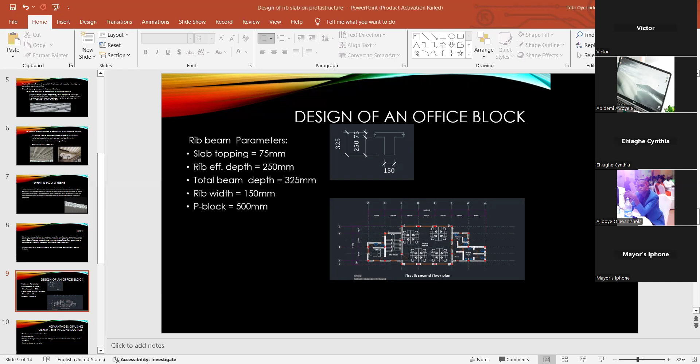There's a background noise coming from someone. Somebody should mute their microphone on the other end, so it will not disturb your lectures. Yes, I'm here. Yes, I can hear you. Can anybody hear me? Yes, I can hear you.

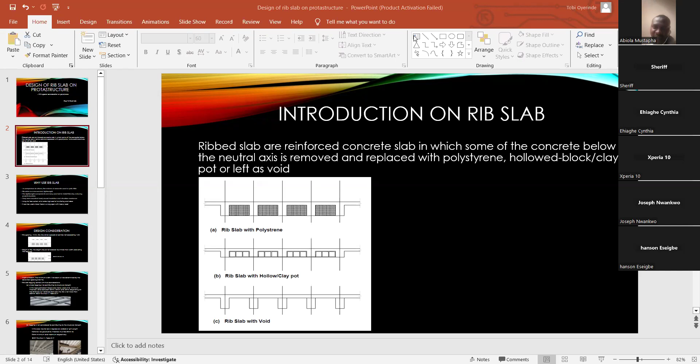So, like I said, I'm trying to introduce everyone to the rib slab. The rib slab is a type of reinforced concrete slab in which some of the concrete below the neutral axis is removed and replaced with either polystyrene, hollow clay pots, or left as void. As you can see in the example, we have a rib slab that is replaced with polystyrene, or the neutral axis is replaced by hollow clay pot, or it can even be left as void.

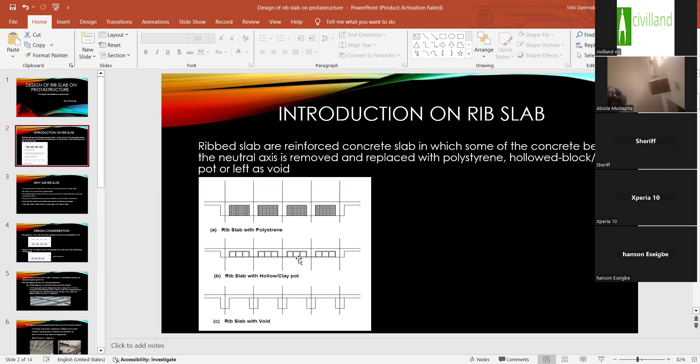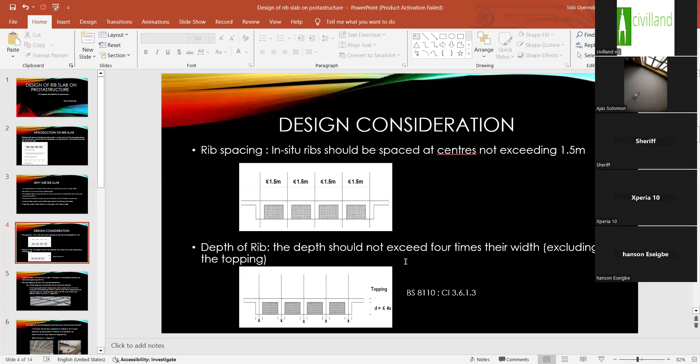So in the design of rib slab, there are some considerations we need to adhere to. One consideration is the spacing of the ribs, which should not be more than 1.5. Another thing is the depth of the rib. The depth of the rib should not exceed 4 times the width, excluding the topping. For example, if we have a rib of 100 mm, the depth should not exceed 400. The minimum width of the rib can be determined by the cover, bar spacing and fire.

The other consideration is if the topping is not contributing to the structural strength. In this type of rib slab, you can leave the spacing as void, or you can use polystyrene. So those are the considerations before you design a rib slab.

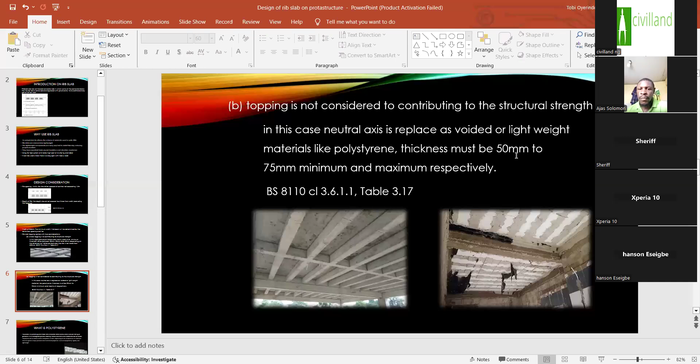In one of my recent projects, when I posted some of these pictures, a lot of people asked, engineer, what is polystyrene? Polystyrene is a synthetic polymer made from the monomer styrene. So polystyrene is actually a petrochemical product. In our local language, we call it fuke fuke. I don't know if people understand. Fuke is what we call these things.

When we were very small, we used to play with it. If you put it inside petrol, for example, you can see the instant reaction. That tells you that polystyrene is a petrochemical product. Polystyrene can be hard, solid plastic, or foam, depending on the temperature the manufacturer decides to use.

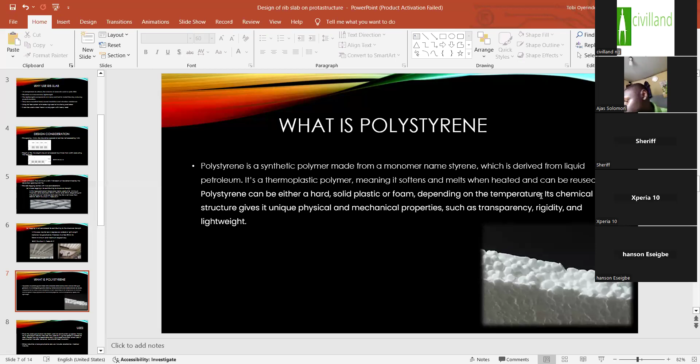So one of the uses of polystyrene for construction purposes stems from its lightweight nature. Polystyrene is very light, so that's why we sometimes recommend it for some of our clients. Maybe they want to do a high-rise building and maybe the soil on that land is very poor. So most times we recommend or we design a rib slab with polystyrene so that it can reduce the overall weight of the building going down to the foundation.

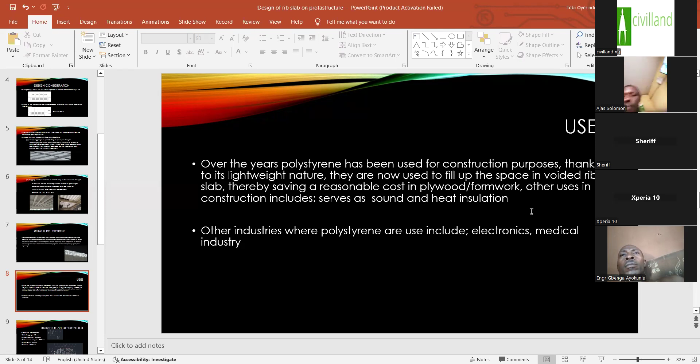So other uses of polystyrene include electronic and medical industries. So now we dive into the design proper. And before we go into the design proper, there are some parameters we use during our modeling. So I'm going to use a topping of 75 mm.

Remember that one of the considerations is that if you are using polystyrene, that is, if the slab is not contributing to the structural strength, the topping should be less; it should be between 50 mm and 75 mm. So you can see that the topping is very small, unlike our usual solid slab where we can go as high as 120, 150 for our solid slab.

So the effective depth I'm going to use is 250 mm. Then total depth is 325 mm. The rib width is 150 mm. And the spacing, this P block means the spacing of the ribs. That's actually the size of our polystyrene. So the polystyrene standard size from the manufacturer is actually 3 meters by 3 meters by 600.

But we cut it into sizes as designed. So in this case, our polystyrene size is going to be 250 by 500 mm. So we'll see more of this during the modeling in Protastructure. So I will stop this one now. Then I will open the modeling so we can all see how it's done.

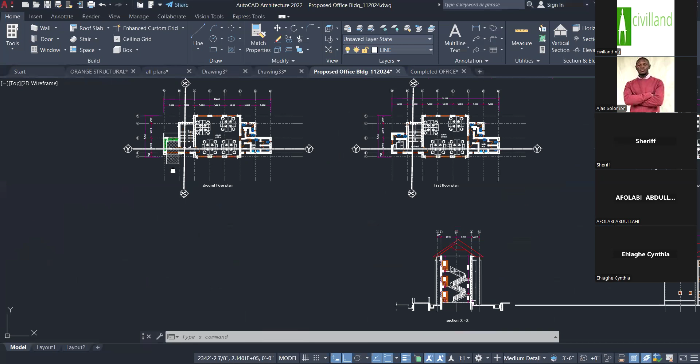So this is actually Protastructure software for people that don't know, one of the engineering software that we use in design. So here I want to design an office block. Okay, let me show you the AutoCAD drawing. So this is the plan that we want to design. It's an office block of 9 meters by almost 8.5 meters.

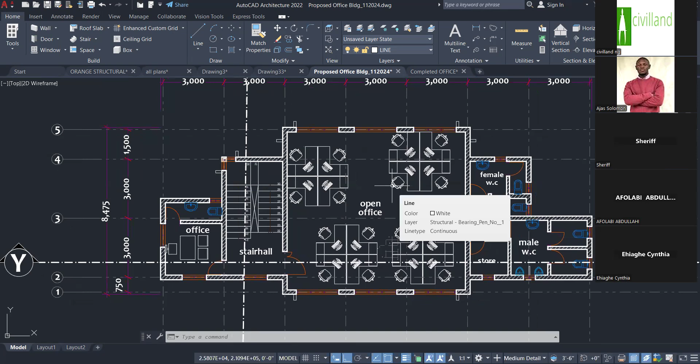So I'm particular about this open space. That's one of the advantages of using a rib slab. It can go as far as a 9 meter by 9 meter spacing. When we have a length and breadth of 9 meters by 9 meters, in this kind of case, a solid slab cannot work, but a rib slab will work conveniently. And the floors are the same thing. You have the ground floor and first floor plan. So now we go back to our design software.

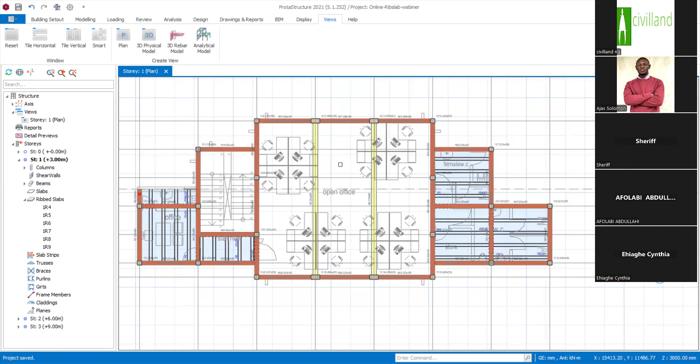Yeah. So because this span is large, I have to divide it into three and put a beam. So this panel is now divided into three panels, so that it can be convenient for the rib slab. So now remember the parameters that we have in my PDF. So I'll use the same parameters for this rib slab.

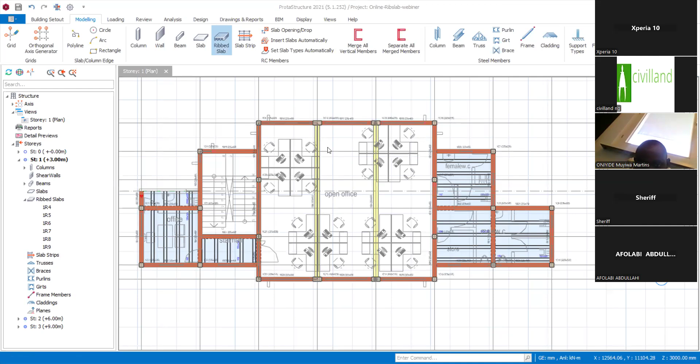Our width is 150. Then our height of the beam is 325 mm. The topping of the slab is 75 mm, while the base block is 500 mm. So we now insert this into our model. So I've inserted the rib slab into our model.

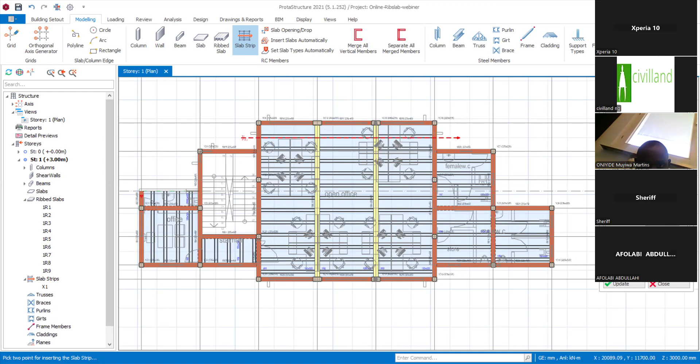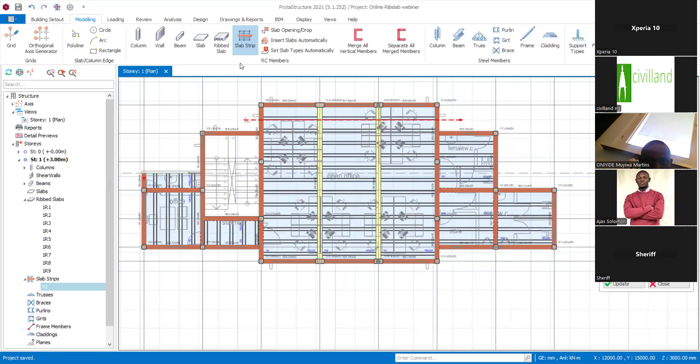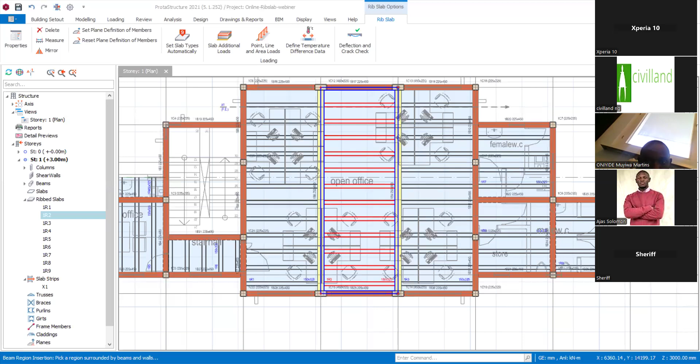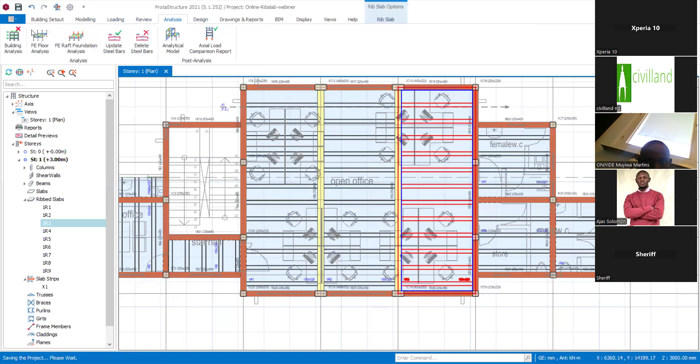So the next thing is to check our analysis. Let me see, putting the axial load here. So I just want to quickly run this analysis.

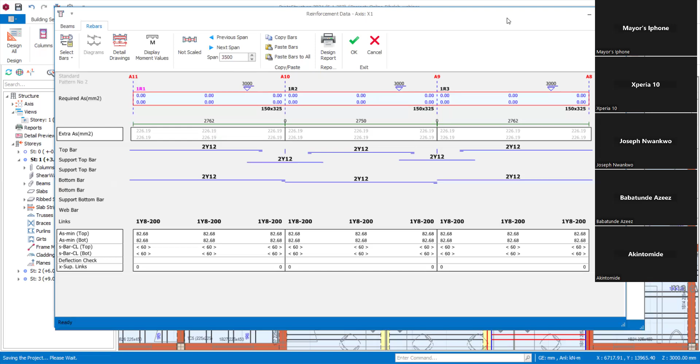So the design for this rib slab is completed already. One of the advantages of using this rib slab is that for the top slab of the rib slab, you don't even need too much reinforcement. Maybe nominal bars like wire mesh or 10 mm can be used. If you look at this beam now, they are just Y12 reinforcements, which shows that it's very economical using rib slab for our buildings.

But before we design for that, as a structural engineer, we have to work on the drawing, because it's not just that we say, okay, I've seen engineers using rib slab, so rib slab is the best. A structural engineer will actually decide the best way to design your rib slab. So for this modeling now, the modeling is done,

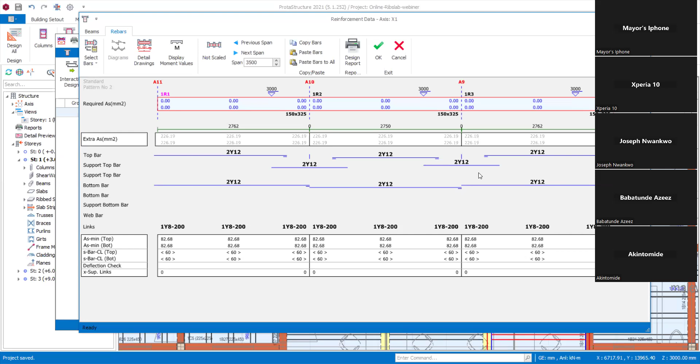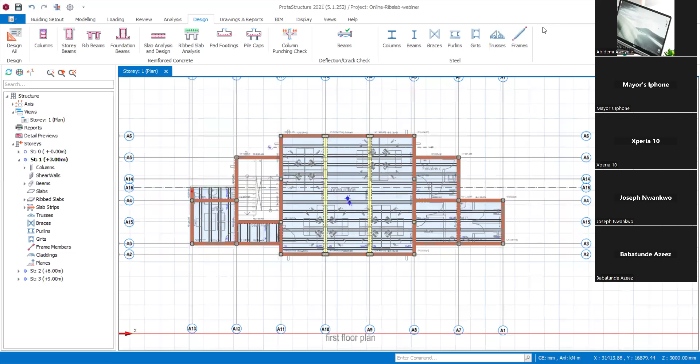and we can see that the reinforcement is okay. We have Y12 for both the ribs. You see all this spacing here, the reinforcement inside our rib beams is Y12 all through, and it's very accurate and okay. So there's no cause for alarm once the design is done and completed. Because of time, I will now take you back to our template.

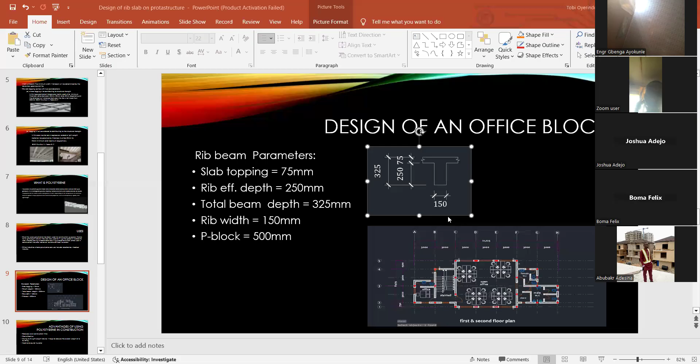Some of the advantages of using polystyrene are that it reduces the construction time and it's cost effective. You don't need too many beams; just the primary beams are very important. Unlike solid slab where we put beams everywhere, you don't need too many beams when you want to construct or design a rib slab. So it's very cost effective, because we are reducing a lot of material.

You are reducing formwork, you are reducing wood, you are reducing reinforcements, and since the volume of concrete is also reduced, you are also reducing the total cement, and the granite and sand will be reduced. So it's very cost effective. And owing to its lightweight nature, it helps to reduce the overall weight of the building. Like I said before,

if you have a very poor soil report, what we do is use polystyrene so that we can reduce the overall weight of the building. It's also good as a sound and heat insulator. People also use it for other things like interior designs now. You can use polystyrene for your parapet also; most people now cut it into the size of parapet needed. So I think that's all for now.

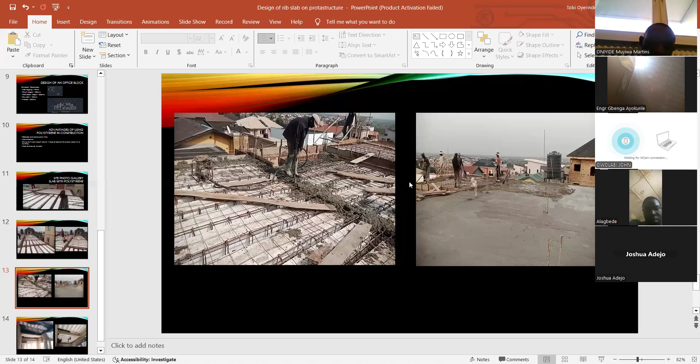Do we still have one or two questions? My question is, how safe is this in terms of fire resistance? That's one of the disadvantages of the rib slab. But in case of fire, only the polystyrene will be affected. The concrete will still be in shape. So even if the building is on fire, the building will not come down, unless there's a very enormous fire.

You can only have an issue with the polystyrene; the building will still stand. That doesn't mean the building will come down. The polystyrene is only taking space; it's not a structural member. So if I remove this polystyrene now, the building will still stay, just like what I showed you here.

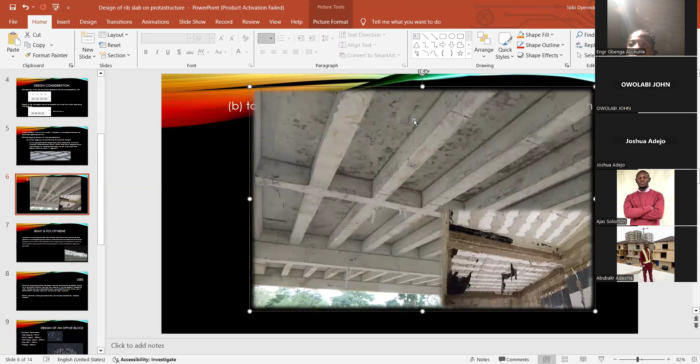You can see this is a voided rib slab. These are the spaces in between the ribs that the polystyrene is taking. So polystyrene is not a structural member, and there's not much effect on the building.

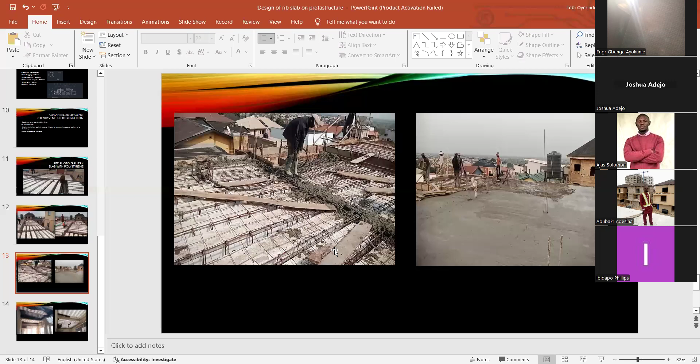Hello, good afternoon. Yeah, good afternoon, sir. Yeah, I'm sorry. Little did I know that the webinar would be today, and I joined not long ago. Unfortunately, I don't know if you have treated the aspect of the services. That I want to know. Number two, you've explained, I mean the little I could hear from what you're saying, about the rib slab.

How much time can the slab, the concrete element, I mean the structural element, withstand fire in case of any fire? How much time? Bearing in mind that the polystyrene you're talking about is inflammable. If it catches fire, it's going to help in the burning. It's going to help in combustion. So how much and how long can the slab and the beam withstand fire?

Two, have you treated services? No, we've not treated services, but I'll discuss it too. All right, so those are my questions. Okay, let me quickly answer that. So in the event of fire, somebody has also asked this, the polystyrene has a disadvantage. When it comes to fire, it can easily spread. So that is one of the disadvantages of polystyrene.

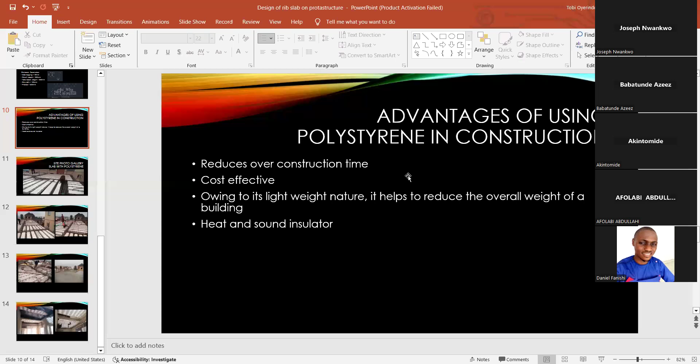So the building will not be affected. Let me not say it will not be affected; it will not have too much effect. Because once you have fire on the building, even concrete is weak; there are degrees of fire that concrete can attain. That's why we have reinforcement inside. So there is not much effect in the event of fire, because polystyrene is not a structural member. It's only filling up space.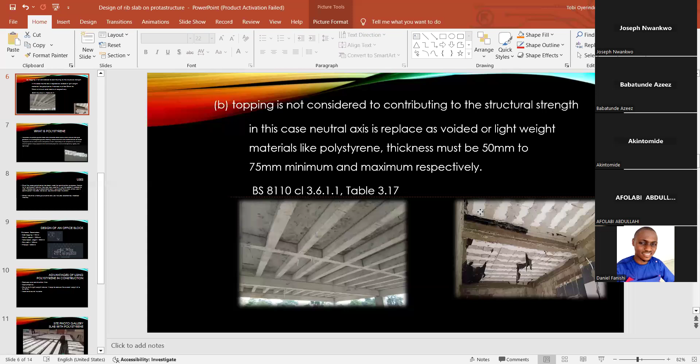Do you hear me, sir? Yes, I do. But personally, I would have preferred making the slab space hollow, removing the polystyrene. It will be better. Since it's not adding to the structural element, we can remove this polystyrene. I've used it before, way back. But what I'm actually particular about is the services aspect of it.

And the building is still standing, and that was about 15 years ago. It's an office space, 4 suspended floors plus a penthouse, and it's still standing as I speak to you. So it's a technology that is very good, the building weight is going to be very light, and all that you have just enumerated. But in the event of fire, will it not be better for us not to have those polystyrenes there? It will be better because it's going to help the concrete slab at the end of the day.

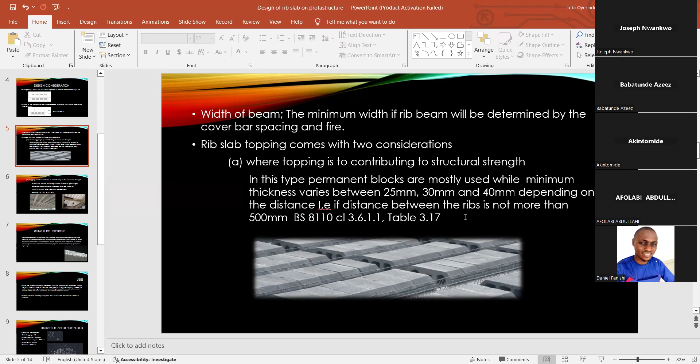So when are we going to talk about the services aspect? Yes, the services aspect is also achievable on site. If you look at these drawings, these pictures, the topping is 75 mm, and we have space in between the ribs. So in between those ribs, between the rib reinforcement and the polystyrene, you can actually pass your pipes. You get me? You understand? So you can actually pass your pipe in between the polystyrene

and the reinforcement. Another thing we also do is that under the polystyrene, we can just puncture and place what you want. You must have placed your pipes before you put even the polystyrene and the iron reinforcement. Some small services can be put in place. So once you are installing the polystyrene, you can just cut around it and put the polystyrene on top. So I've never had issues with services using polystyrene, because there are spaces where you can put them.

Why I'm saying that is I'm aware of some structural engineers that will never allow services penetration into the beam, not to even talk of a construction system that is very light, and the rib is, I don't think, more than 100 mm. Am I correct? What size is the beam? The beam is 100. The minimum rib is 100, but you can have 120, you can have 150. So those spaces can take care of the services.

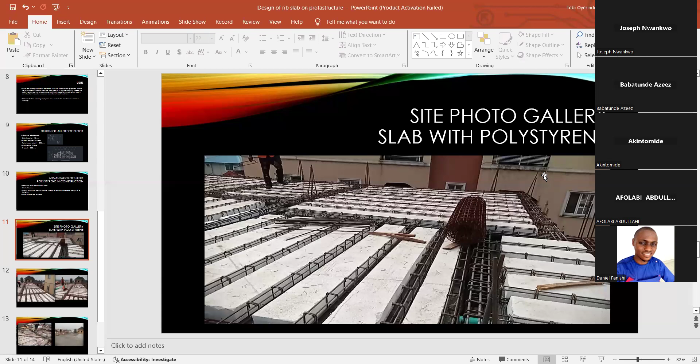What size of pipe is this? This is a 3 inch pipe. So if you are having a 3 inch mat on top of the polystyrene, it will be difficult for you to have a 3 inch pipe in between. No, another thing we do, although it might be difficult, is on top of the slab we can put some services there, although we have challenges. That makes your slab thicker.

No. What happens is we have a topping of 75 mm, so part of the pipes will be inside the 75 mm, and some of them will still show above it. So when they are doing the finishes inside the rooms, they can use tiles and so on to cover it up. All right.